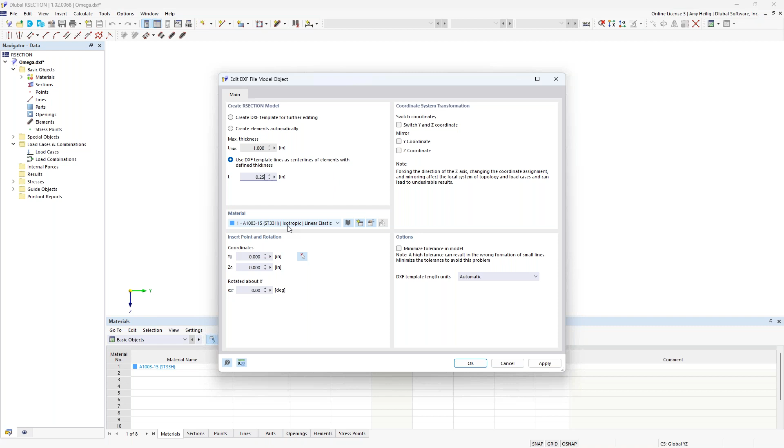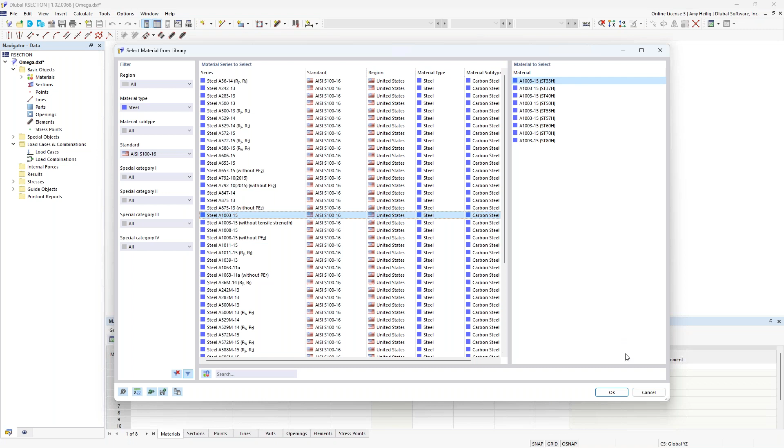We can visit our material library, and over on the left, we have the filters to utilize the steel dropdown and then the AISI S100. So here are all of the available materials for cold-formed steel. And notice that as we click through these different options, there are several subcategories as well. For this particular cross section, we'll utilize the A1003-15 and the subcategory here of ST33H. So that material will then be set within this dropdown, and we can click OK.

So once the import is done, we see everything automatically generated for this custom cross section. Now, notice that these are completely straight elements. We get a little bit better performance with the finite strip method with cold-formed steel sections when we just model these straight elements directly. It is possible to also model arcs at these corners where the elements join, but just know that the calculation time will be increased because of that. So ideally, it would be best to keep these as straight segments.

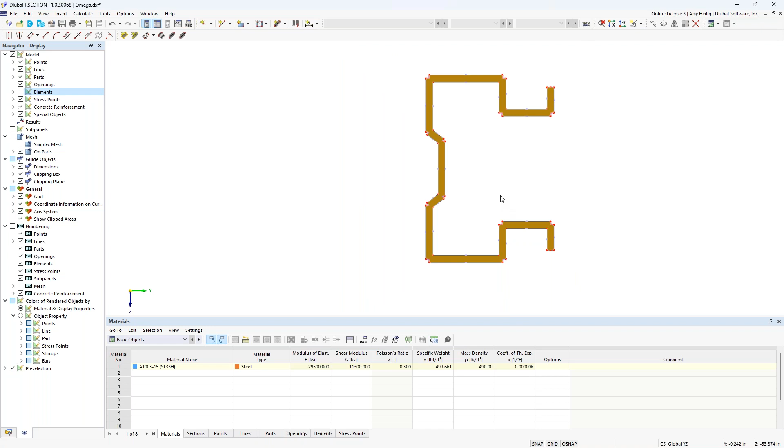Now, looking at the custom cross section here, we have a couple of elements that, again, were automatically generated. We'll start off with what we call the part. The part is automatically created between the exterior boundary lines of the cross section. Then on top of that, we have what we call the elements. Each one of these segments here is comprised of an element.

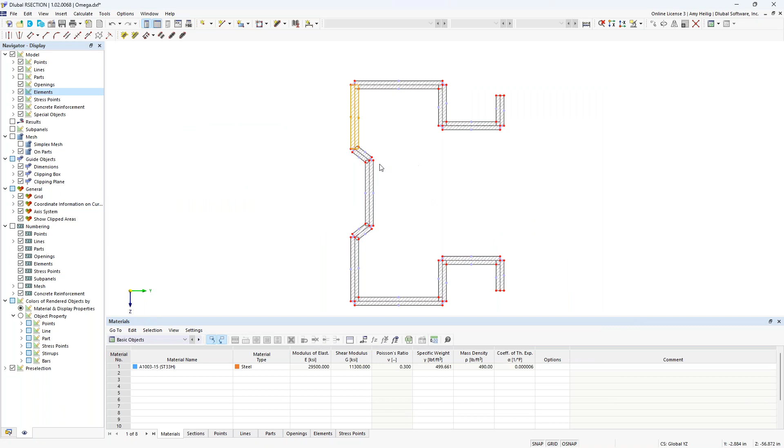We can right click to edit the element. What you'll see here is that each of these has a particular thickness assigned to it as well as a length. This information is important for the thin-walled analysis and is required. So we would need both the parts and the elements.

So going back to the navigator here, I'm going to right click on the model name to access the base data. There are two analysis methods. The finite element analysis is set here by default, but this would be more so used for massive cross sections. Instead, we want to modify this to a thin-walled analysis.

Additionally, under the manufacturing type, we can set this to cold form. This will just be helpful once we bring this cross-section into RFEM that this data will already be set. When we click OK, we can simply go to calculate, calculate all, and immediately we'll see here that the cross-section properties are presented to us in table format.

So we have the area, for example, the moment of inertia, the section modulus, and this is the information that needs to be transferred to RFEM in order to understand the cross-section properties here of this section. Additionally, you'll notice the unit stresses are given here based on a 1 kip applied load, for example, for axial forces or maybe a bending moment. We can also view those stresses with the 1 kip-foot applied to this cross-section.

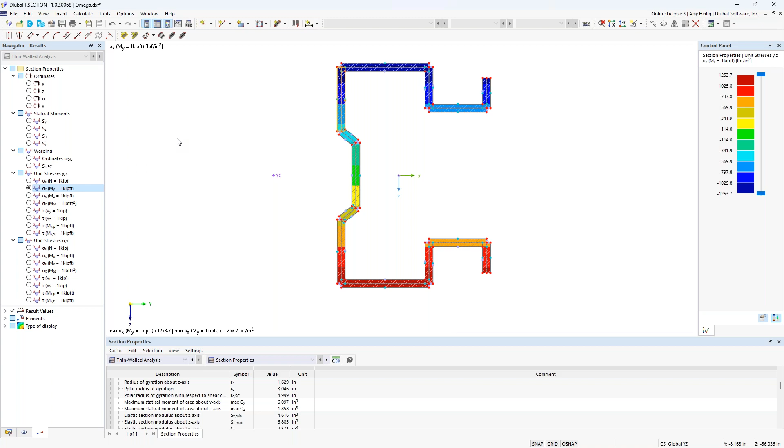So once we have the cross-section properties, we do want to save this to our computer. So in order to integrate in RFEM, we do have to have these saved cross-section properties from the calculation as well. And we will jump over to RFEM. So beginning our cold form steel structure today, when we create a new model, we would give it a model name. The type of model would be set to 3D.

And under this second tab, this is where we have our optional add-ons. So RFEM is the base program, and it's responsible for the modeling, the loading. We can integrate with BIM software, and it can run the full static analysis. So this means deformations, internal forces, support reactions. But if we want to take this a step further to actually carry out the design according to the AISI or the CSA S136, then we need to activate here the steel design add-on.

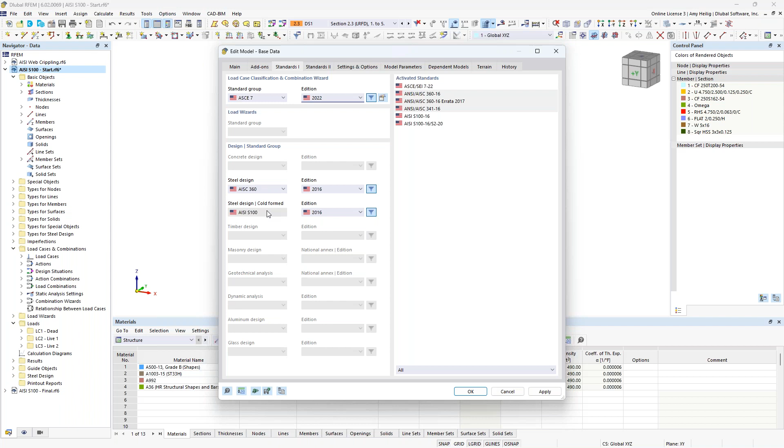Now, under this third tab, this is where we set our standards. So we can see that we will generate our load combinations automatically according to the ASCE 7. We also have here the NBC. We have implemented the latest standard according to the 2022 for those load combinations. Then because the steel design add-on is active, we see here the AISC 360 is set for hot rolled steel, and we have the AISI set for cold form. Now, alternatively, if we were doing design in Canada, we could set this to the CSA S16, and we'll see the cold form update here to the CSA S136.

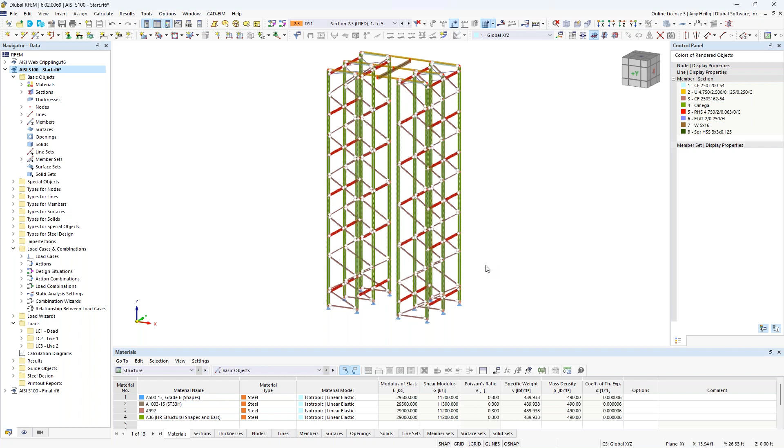So once this information is input, you can see here that for the sake of time, I have gone ahead and modeled our entire structure here. So this is some type of racking system maybe used for automatic storage and retrieval. Now we do have other webinars, tutorials that are dedicated to new users in the program where you can learn how to draw a beam, how to apply supports. So for the sake of time, again, we'll go ahead and just do a quick model review.

So over on the left in the navigator, we have here our various cross sections. So if I edit these cross sections so we can take a closer look, we'll see here the cold form steel sections applied to this particular model. So we have some channel sections, additional channel sections with stiffeners, and that custom cross section here was also brought in from RSECTION.

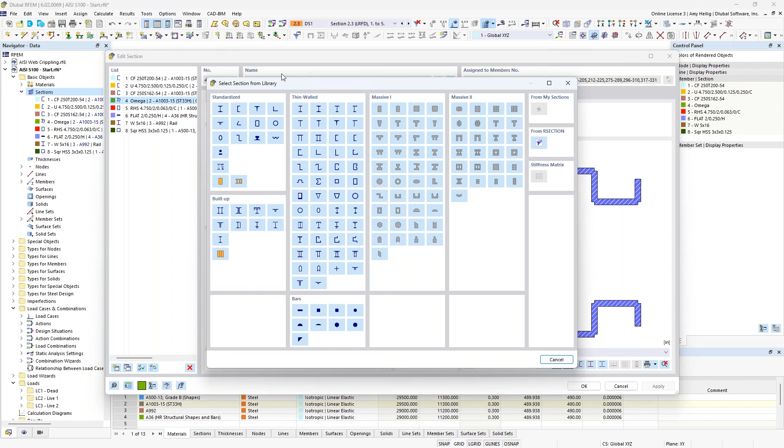When we look at our library database for our cross sections, if you want to choose a standardized section directly from the AISI, for example, if we take a look here at our channels, we'll utilize the filters once again on the left to filter to the United States, as well as the AISI D100-17, and we see the various channel cross sections, including hat cross sections, available to us here, again, directly from the AISI standard.

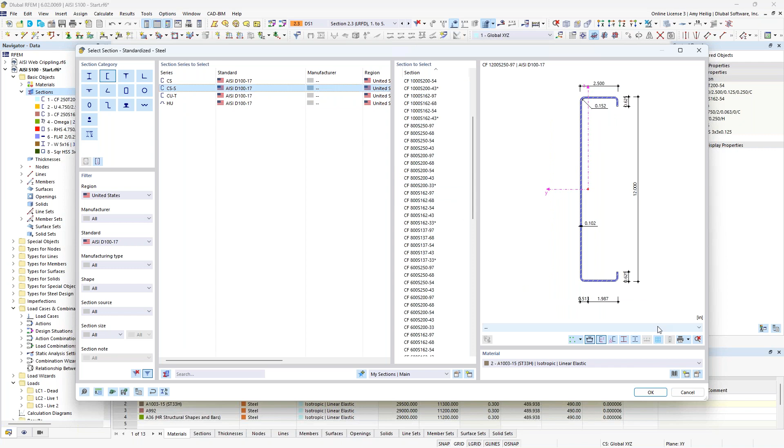Now, alternatively, if you have a parametric section that fits within the criteria listed here under thin-walled, you could simply input the dimensions and the custom cross-section properties will be automatically calculated in RFEM directly. And then alternatively, we have the import here from RSECTION, and that's what we utilized for the shape here in the background. I just navigated once I clicked this option to that saved file from RSECTION on my computer, and we can bring this in like we would any other member.

So in addition to these cross sections, I have also assigned a material. So similar to our section, we can always visit the material database. Over on the left, we filter to steel, to the AISI, and once again, we have access to all of these various materials directly from the standard.

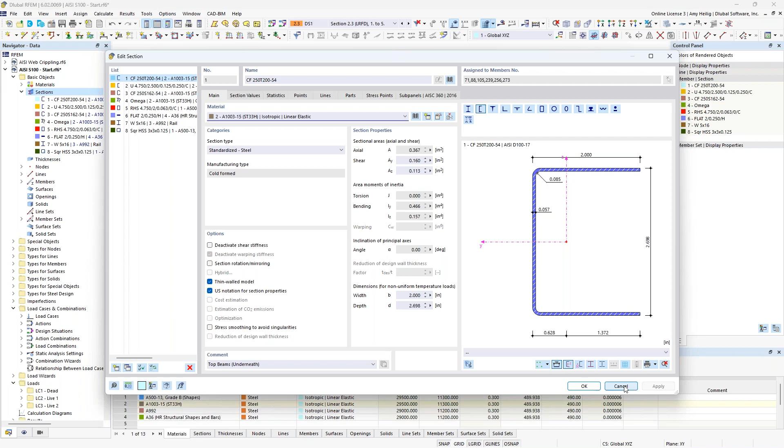So now that we have the cross sections and the materials covered here, we'll also see them within our navigator over on the left. When we take a look at that custom cross-section here for our column, and I'll zoom in, you'll notice that the program has actually rendered this true cross-section for me. And I'll go ahead and create a user-defined visibility here so we can see this in a bit more detail.

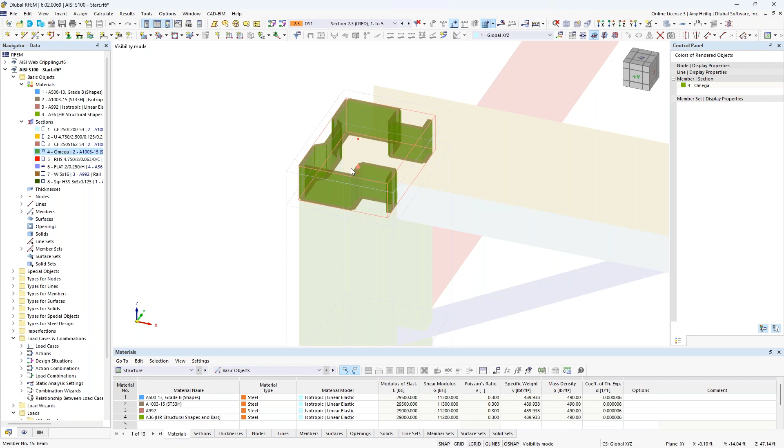So you'll also notice that for these columns, utilizing the custom cross-section, they were actually modeled in segments here. So each one of these is a separate segment. Now, there is possibility in the program to model this as one continuous column and just to keep this as one member and applying intermediate nodes along the length. But alternatively, if we do model this in separate segments, it's entirely possible to create what we call a member set. So we do this by selecting multiple segments.

We can right click, and under the members option, we have here what's called create member set. So that's what you'll notice here over in my navigator, that the program has grouped together these columns. And this will come into play a little bit later on with topics like notional loads, but also the design. Again, wanting to design this as one continuous member rather than those multiple segments.

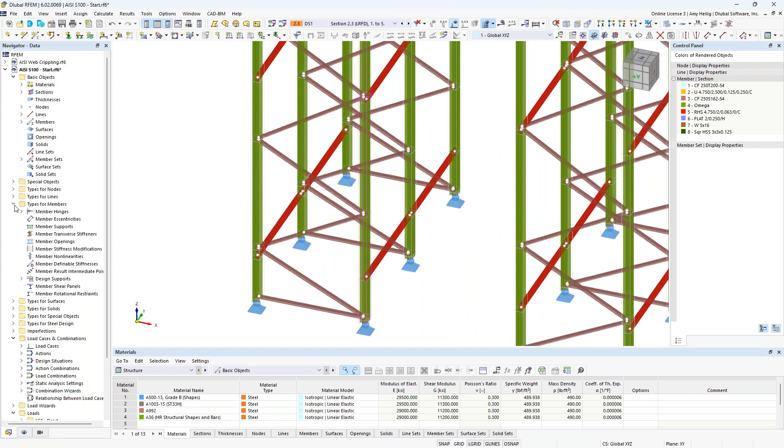You'll also see graphically the member hinges applied with the symbol shown at the member ends. So if we take a look at the types for members, we see here our various member hinges, and the member fixity all depends on how these cross sections or these members are connected to one another. So with cold form steel, it's quite typical to connect them with screws. And I have several different definitions here, just depending on what that connection is.

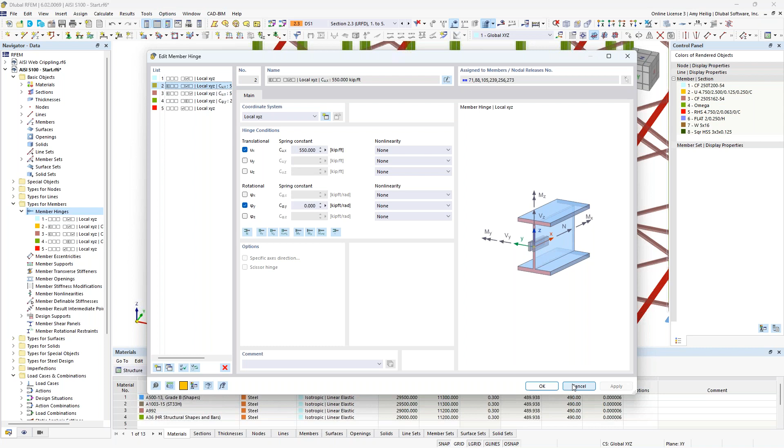So we have our 6 degrees of freedom. These are all based on the local axes of the member itself. You'll notice that for some of these, I've applied a spring constant. So something that's not fully fixed, not fully released, but somewhere in between. So within this model, we can take a look at the different hinges applied. They're probably a little difficult for you guys to see, but as I click through these, they are highlighted in the model depending on which member they are applied to.

And finally, we have our nodal supports down here at the bottom, which were applied just utilizing the tool up here in our toolbar. And these are also a bit special in the sense that initially they just look like standard pin connections, which you'll see under this definition type that we again have 6 degrees of freedom, but these are based on the global axes here, shown here in the background.

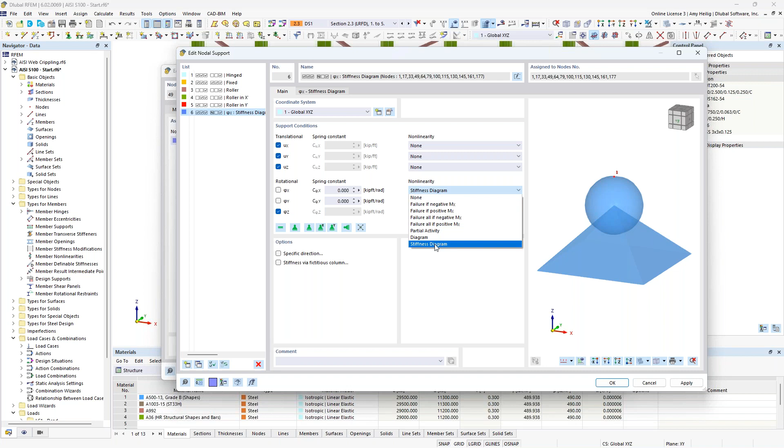So I've restrained the translation for this pin support, including the rotation about the global z-axis, but I've also applied a rotational nonlinearity. So this is within the rotation about the global x-axis, and under the nonlinearity options, I've applied a stiffness diagram. And we now get a new tab here where we can define this information. So you'll notice that I've set this so that the rotational stiffness is dependent on the contact pressure or the downward force for these nodal supports.

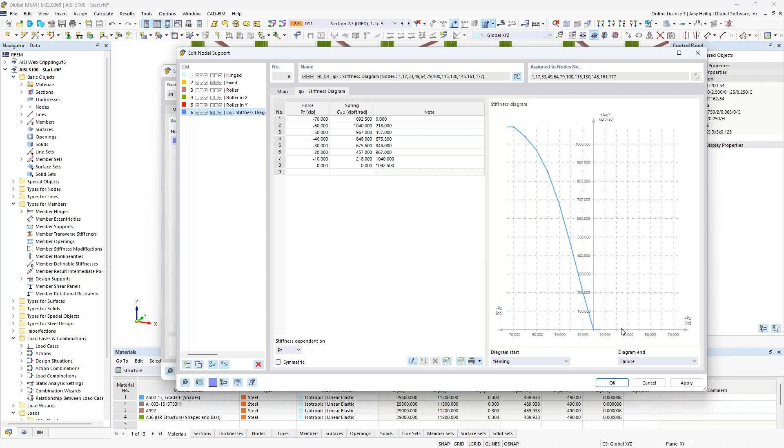So as the contact force increases here, we'll see a greater spring constant, and then at uplift, we'll see that support fully fail for rotation about the global z-axis. So entirely possible here to consider more complex scenarios for our nodal supports as well. So now that we have a basic understanding of the various members within the model as well as our supports, let us move on to loading.

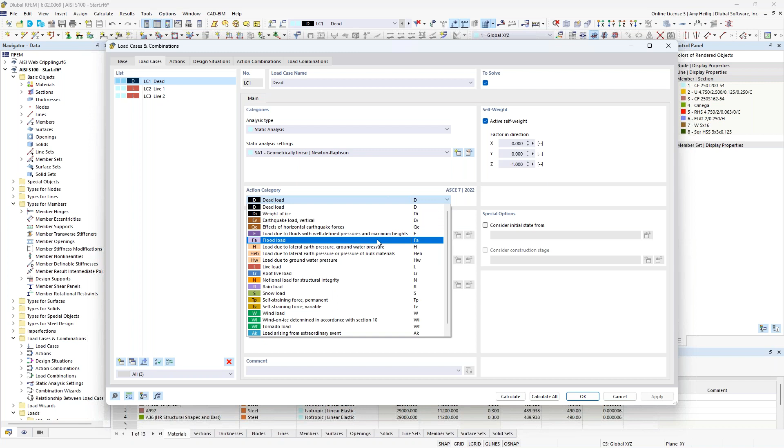So I have here 3 simple load cases that we can access in our load cases and combinations dialog box. So we have the first load case, which is dead load, and you'll notice that self weight is active here, and the action category is also set, which is just dependent on the ASCE 7, because remember back in the base data, this is the standard we're using to generate our load combinations. We can revisit that information here under our base tab, where we'll see the availability to change that standard if we'd like.

The second load case is a live load. So action category set to live, self weight is turned off here. And finally, another simple load case, live load 2 with the action category set to live. So once these load cases are set up, we would need to actually apply the loads to the structure. So we'll begin here with the display of our dead load. So you'll see that I actually didn't apply any additional loads to this load case. We're only accounting for self-weight automatically under the hood for that particular load case.

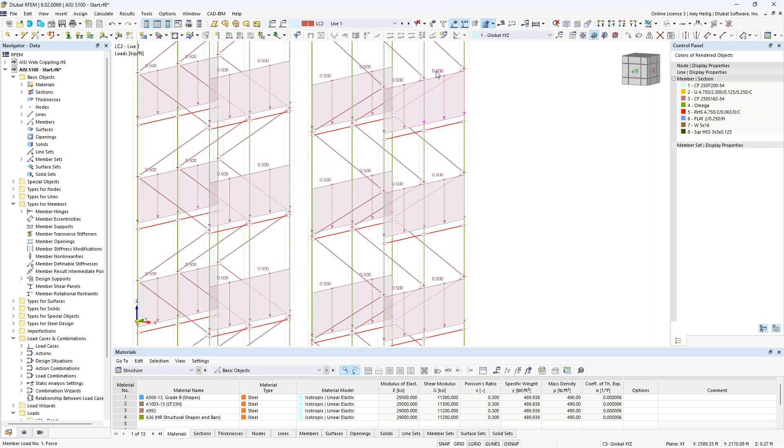Now looking at our live load 1, we see here, and I'll turn this into wireframe view, that we have the member load applied here at our beams, which are spanning between the columns. And a member load can be applied up here in the toolbar. But there is something a bit special about this particular member load. If I double click on it here, we'll see that it's just a standard downward uniform load of -0.5 kips per foot, but we have the ability to consider an eccentricity on the loading.

So when I turn this checkbox on, I get the additional tab up here at the top. Now the default behavior for a load is typically applied at the center of gravity or possibly the shear center. But alternatively, we can move that load application up here to the top center point so that perhaps we want to account for some additional torsion within the member for the design, or we can do so directly within the force eccentricity.

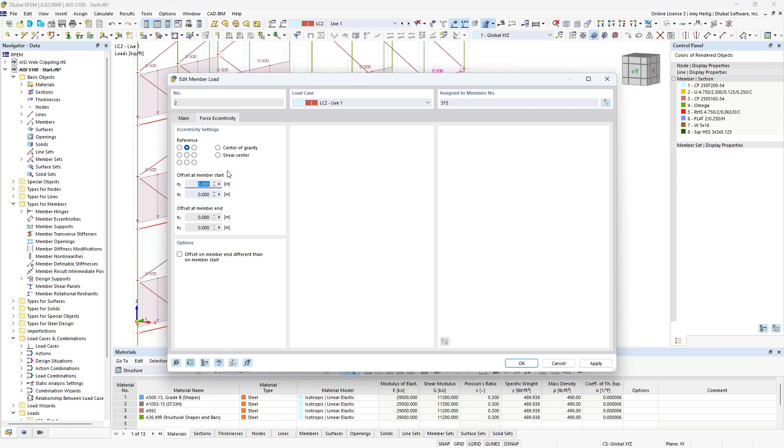So in addition to this first live load, we also have this second live load, and this is also a very simple application with a single nodal load applied up here to our center beam. So this load is just essentially introducing those horizontal forces to the entire racking structure. That nodal load can also be applied up here in our toolbar.

So going back to our load cases and combinations, now that we've generated those load cases, let's take a look at the design situations. So the program has automatically created 2 design situations for us, our LRFD design situation and ASD design situation. Again, these come directly from the ASCE 7, and it's nothing more than just grouping together our factored load combinations for the first design situation and our unfactored load combinations for the second design situation.

We can always click on this little info button here, which will pull that information directly from the standard of what we're referencing. Design situations are absolutely needed when it comes to carrying out the design within the steel design add-on that we activated. So that's why you'll notice that these are by default checked on here for that particular add-on.

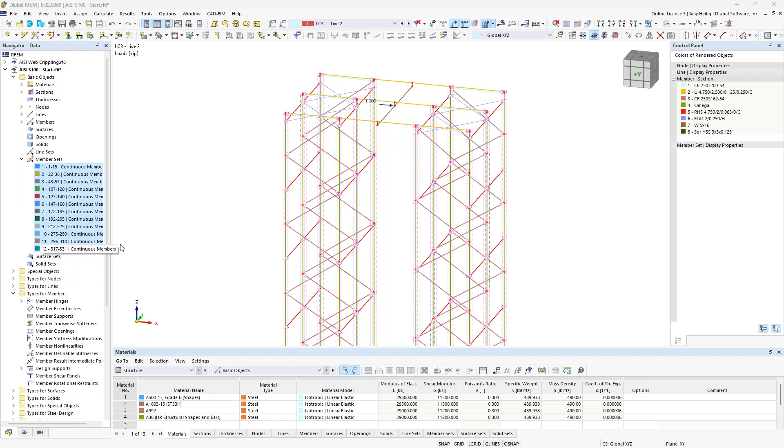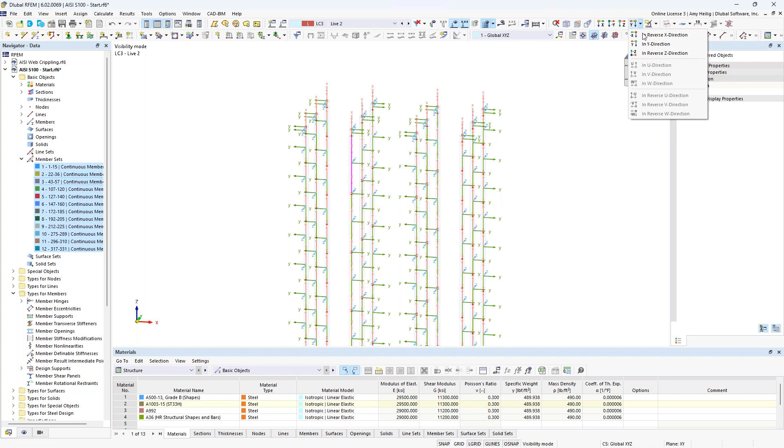So I'll begin by creating a user-defined view here for only my member sets. So we'll go up here to our toolbar and create that user-defined view. I'll go ahead and turn off the hidden objects in the background. Now, additionally, when we create our imperfections or our notional loads, these do depend on the local axis system. So if I right click, I can turn on the local axis system of all of these columns. So we'll take a look at the elevation view here.

Now, the imperfections are going to be available under our navigator here under the imperfections table. So we right click to create a new imperfection case. Now, again, the imperfection directions or the case all depends on which direction you want to apply them in your model.

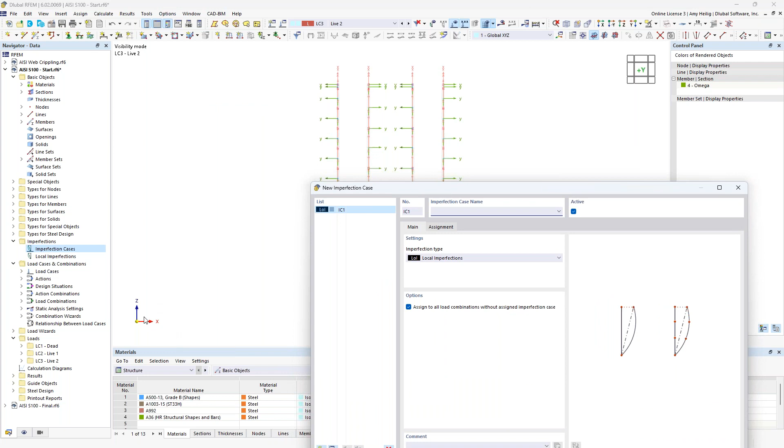For our case today, I'm going to create two simple imperfection cases, one in the global positive X direction and one in the global positive Y direction or into the page here. Therefore, I need two imperfection cases. So we'll begin with imperfection in the X, and then I simply make a copy of this and I'll create my second case, imperfection in the Y.

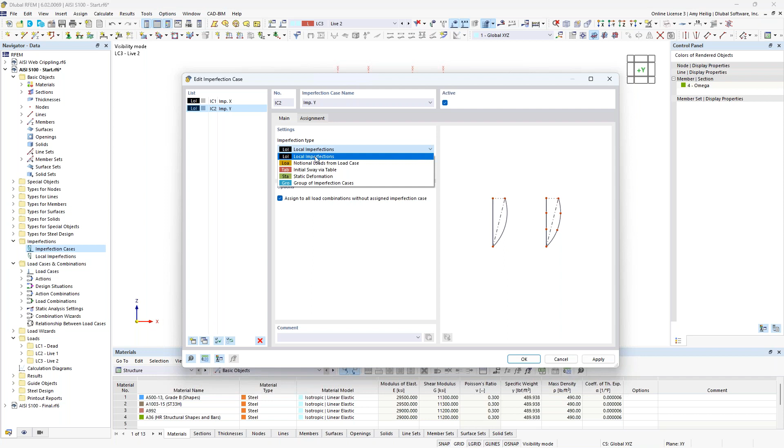Now, the imperfection type within this dropdown will be set to local imperfection. And under the assignment tab, there is the ability to assign specific imperfections or notional loads to specific load cases. Alternatively, though, we can just apply it to all of our load combinations, which is what we'll be doing today. So now that these imperfection cases are generated, we need to actually apply the notional loads to the structure. So now you'll see here under our imperfections folder, these two imperfection cases.

Now we can apply according to each individual member, or we have the ability to apply to a member set. And because these columns are individual segments and I created member sets to group them together as one continuous member, then we will want to right click here to create a new member set imperfection. So within this dialog box, we use our drop down to directly select the AISI S100. And this is going to reference equation C1.1.2-1 directly from the code. So this should look familiar if we look that up within the code.

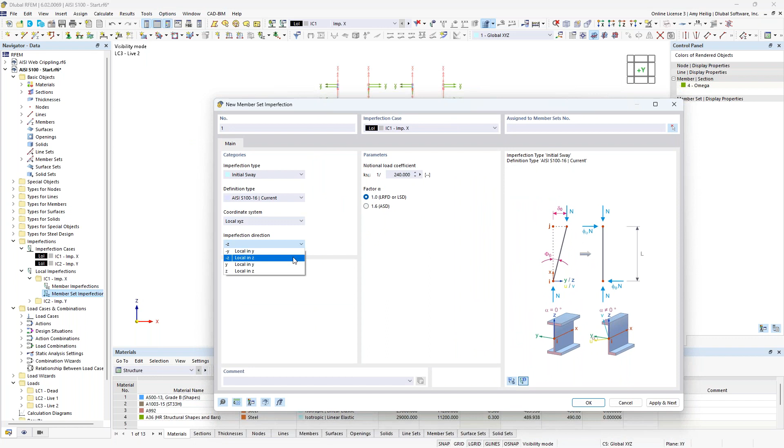So more or less, we are just applying a deflection here at the top of our columns, but the deflection magnitude all depends on the axial force applied to the member. So this is an iterative calculation that the program will automatically apply for us based on the axial forces under each load combination. The imperfection is applied according to the member's local axes. So for this first imperfection in the X direction, we want to apply this based on the negative Z axes. And I'm going to select here my member sets in the first row and the third row.

And we might be wondering, why are the local axes different here for the different member sets? That's because in rows 1 and 3, I have the members rotated at 90 degrees, and at rows 2 and 4, they're rotated at negative 90 degrees. So inevitably, this affects our local axes orientation, which is why we need to take a two-step approach for the imperfection direction. So now that I've applied it to those member sets, I can click Apply and Next to remain within this dialog box and simply modify my imperfection direction to the positive Z local axes. I'll select these graphically as rows 2 and 4. I click OK, and I click OK once again.

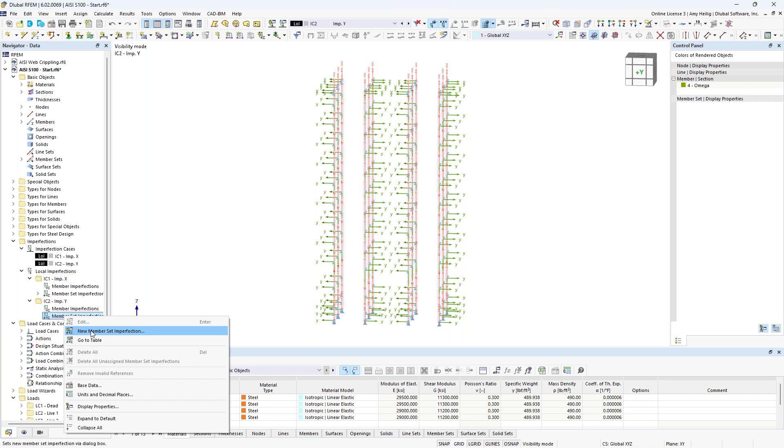Now, if we display our notional loads here, or imperfections, we see that column out of plumbness applied, again, referencing the AISI, to our member sets or our columns directly. We're going to do the exact same approach for imperfections in the Y direction. So we go back to our navigator to right click to create a new member set imperfection, this time under the imperfection Y case. We'll select the definition type directly as the AISI S100 once again.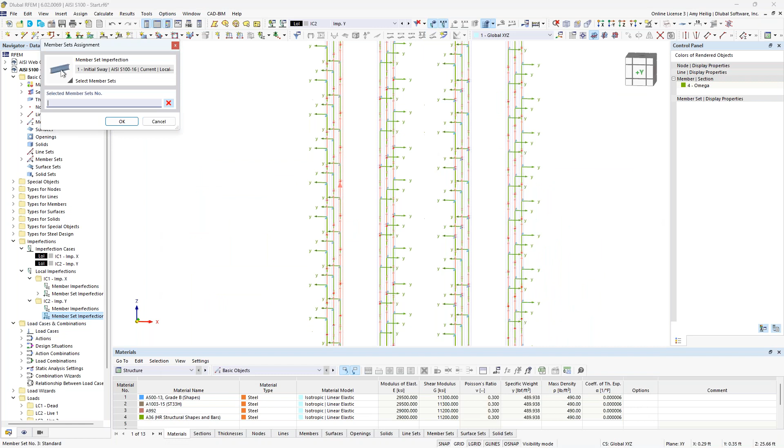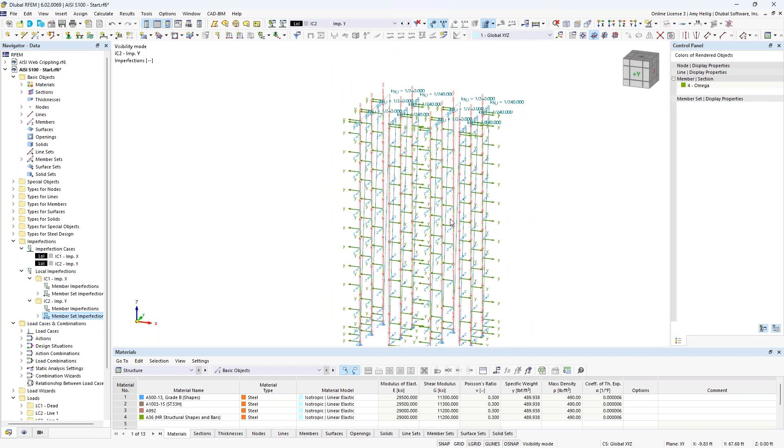The imperfection direction this time is going to be in the negative z-axis, and I will zoom in here to select the member sets in the first row and the third row. I click OK, apply and next, and then we simply modify this to the positive local z-axis to select our member sets in rows 2 and 4. I click OK through these dialog boxes, and now we should see this column out of plumbness, and I'll right click here to turn off the local axis system, applied in the global Y direction. So this is how we can directly account for those imperfections based on the code requirements.

Now that we have applied the imperfections in these various cases, we need to combine them into the actual load combinations. So I'll drop down here to my dead load, and this will allow me to access the load cases and combinations dialog box. Under the design situation where we had previously set the second order analysis, you'll notice that we have a checkbox to consider the imperfection cases that is turned on by default. So for my factored load combinations, those imperfections will automatically be added to the existing load cases as well. Now, the problem is that I want to carry out LRFD design today for my cold formed steel structure, but I'm using my ASD design situation for my serviceability or deflection checks.

Therefore, I don't want to consider my imperfections for this second design situation. Well, it's easy enough to create a copy of this existing definition type. And within this copy, I just simply turn off the imperfection cases. So now going back into my main dialog box for my factored load combinations, we'll keep this as definition number 1. But for my unfactored load combinations, we're going to drop down and select the third option here where we

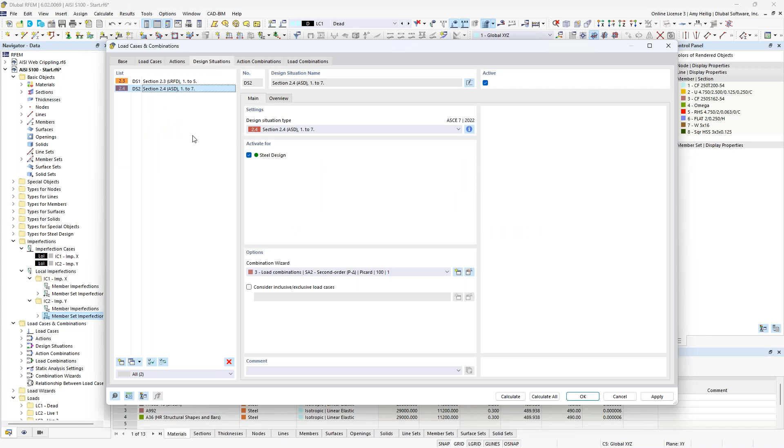The final topic, according to the direct analysis method, is stiffness reduction, and this is given in section C1.1.3. We reduce this stiffness to account for inelasticity effects as well as cross-section deformations. So in order to take into consideration the stiffness reduction, we are once again going to go in here to our combination wizard settings. And this option is actually controlled directly here with a new structure modification. So we create a new definition type, and we're going to be applying this to our members. When we turn this on, we get an additional tab here, where under the member modification, we can use our dropdown to create a new member stiffness modification.

Now, very similar to what we saw with our imperfections or our notional loads, we also have the AISI S100 available in this dropdown. So this will reference the code directly and the particular equations given here to iteratively calculate this tau sub b factor that will be applied to the flexural stiffness for each member. And again, this is very similar to what we see within the AISC. Now we also have an additional factor here of 0.9 that's applied to both the flexural and the axial stiffness. Now a difference here from the AISC is that within the AISI, this is 0.9, but within the hot rolled steel standard, this is 0.8. So that is one difference that you'll see here.

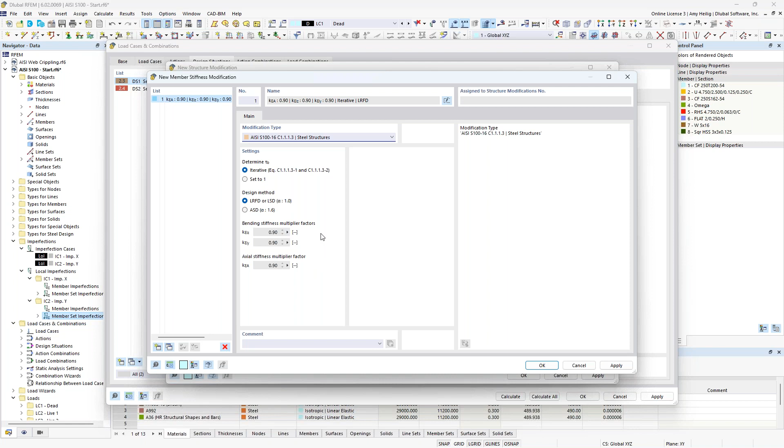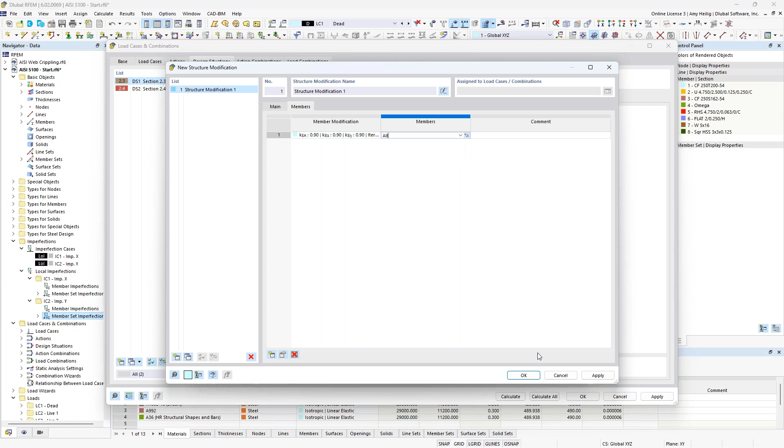Now, the code says to apply this stiffness reduction, once we have defined this, to all members that contribute to the lateral stability. So we certainly could use this option here to graphically select those members, or we could input the member numbers. Now, alternatively, we can just apply the stiffness reduction to all members. The code goes on to tell us that this is also possible. So if we use our drop-down box for all, we'll now apply those stiffness reductions to all cold formed steel members within this model. But yet again, I only want to consider this for my strength design, which will be carried out with this LRFD design situation. For my unfactored load combinations, I do not want to reduce the stiffness, so I simply leave this unchecked here.

So once again, we'll go back to the load combinations to check this out in more detail. And sure enough, for each factored load combination, we see the additional setting here to reduce the stiffness. But if we jump down to our unfactored load combinations, this option is turned off.

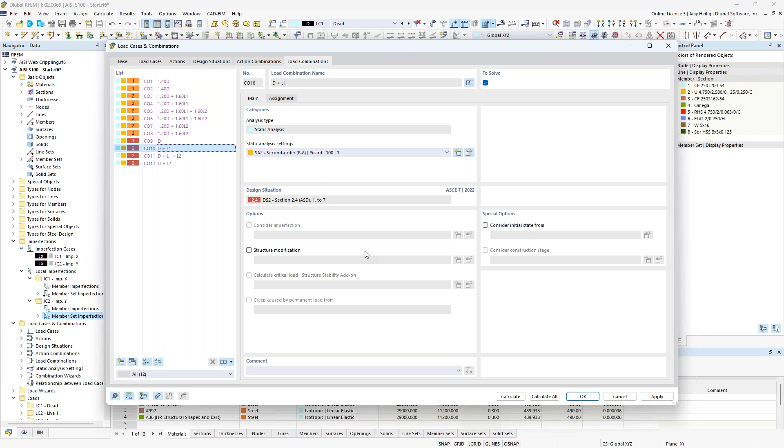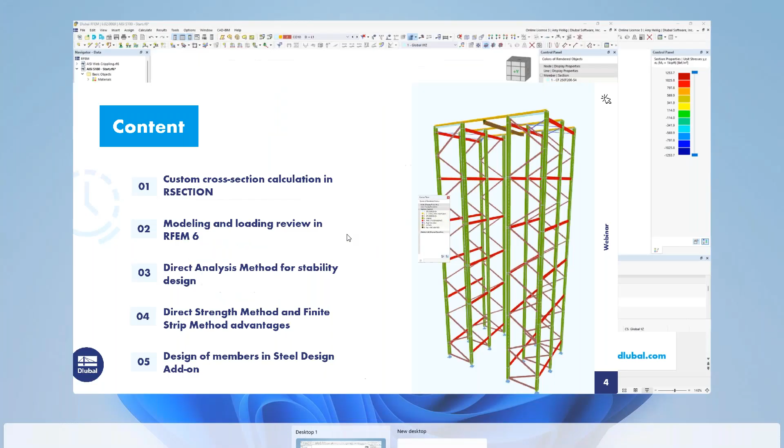Okay, so now that we have fulfilled the direct analysis method requirements, we're technically ready to run the full analysis. But the huge benefit of RFEM 6 is this better integration of these add-ons for the design within the main program. So we'll go ahead and continue on with some of the design input information specific to the AISI to carry out that workflow. For this, I'm going to go back to the PowerPoint here because I do want to talk in a bit more detail about the member buckling behavior. Very important topic when we're talking about these very thin-walled cross sections.

So we know that there are failure buckling modes that are typically caused by compressive stresses on our members. And this is usually seen when we have a bending moment or an axial force. Well, when we're talking about cold formed steel, there are 3 buckling modes that we typically consider. The first is going to be local buckling. So this is essentially where the elements bend with no translation at fold lines. And what I mean by elements, if you remember back to our custom cross section here, each one of these segments is a particular element. Well, what we see also with this failure mode is that we have a short half wavelength. And what I mean by wavelength is this is the length at which the buckling shape repeats along the full member length.

Now, additionally, we also have global buckling to consider, and this is lateral bending of the entire member, and we typically think of this with flexural torsional, or lateral torsional buckling. Now for this, we'll see one long half wavelength, which is always dependent on the unbraced lengths for these particular buckling modes.

And finally, a bit more unique to cold-formed steel is distortional buckling. So this is more or less a combination of local and global failures, where we have some translation at the fold lines, but also the half wavelength is somewhere between what we see for local versus global. Now, there are 2 methods throughout the AISI to address buckling. The first is the effective width method, and the second is the direct strength method.

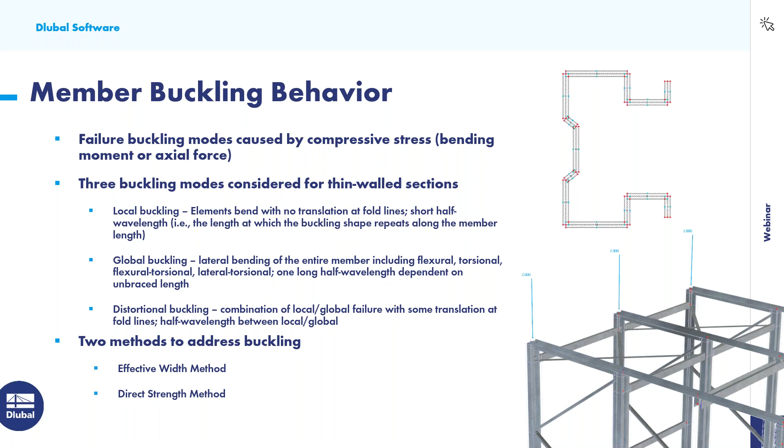So going to our next slide here, let us talk a little bit more about the effective width method versus the direct strength method, and maybe some advantages here that we have. So the effective width method essentially will consider each individual element here. So again, these elements are what comprises up our cross section. And an effective section calculation is required for each one of these elements. And we really don't have any interaction between these elements for the overall member or section behavior.

Now, alternatively, when we turn to the direct strength method, and this is going to be the method that RFEM is going to utilize, this has definitely some advantages in the fact that no effective width calculation is required for each one of these individual elements. There's no iterations required, but rather the gross cross-sectional properties are used for the entire section. We also have the interaction of all elements for all stability limit states because we're not considering, again, these individual elements, but rather the full cross-section itself.

We also have compatibility and equilibrium maintained at the element junctures. So where these elements connect is specific to the direct strength method that, alternatively, in the effective width method, more or less are not accounted for. Direct strength method is also applicable to a broad range of sections. We might see more limitations when we talk about the effective width method and which cross sections it can be applied to. Direct strength method, we really do have a lot more freedom here to apply this to pretty much any custom cross section as well.

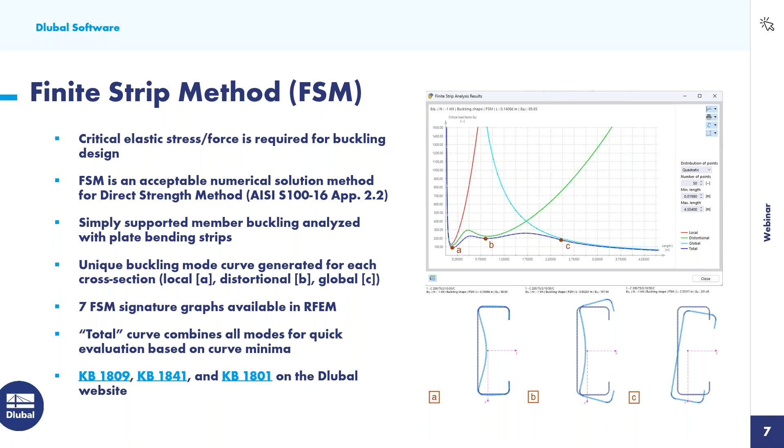Now, this is certainly a very interesting and complex topic, so I would refer you here to some knowledge-based articles that we have directly on our website that explain the finite strip method in more detail. It directly references the AISI. Those hyperlinks are included in the PowerPoint handout that you can access within the GoToWebinar to see those on our website in more detail.

Okay, so what we will do now is to go back to the RFEM model, and I'm going to revisit the cross sections here. So looking at the various cross sections, and we'll immediately jump down to that custom cross section, our Omega section in particular. If we use our drop down over on the right, here are those 7 unique graphs that I just mentioned for the finite strip method. And these are all based on the applied unit load.

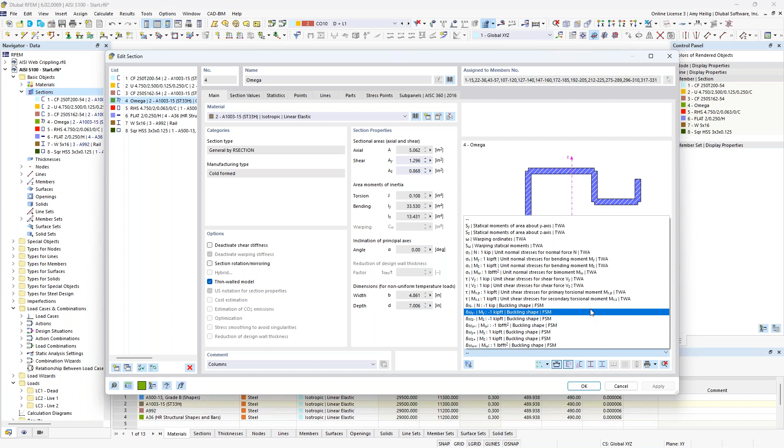So if we take a look at 1 kip axial force, what we will see is that finite strip method plot, again, referencing that PowerPoint. And this currently is showing the total curve. But additionally, what we can do here is to plot the local curve by selecting it within this dropdown. And we see that appear over here on the left-hand side with the red curve. We can also display the distortional curve. And finally, we can display the global curve.

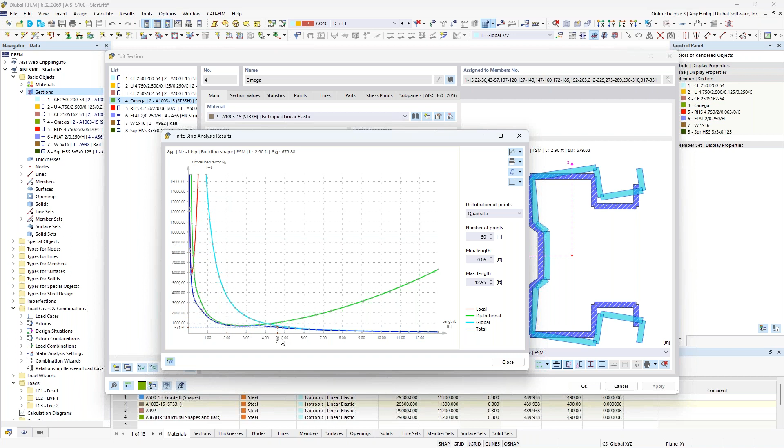And ultimately, that total curve is going to consider all 3 of these, again, for just a quick evaluation here based on the curve minima along the length. So this is what's happening underneath the hood for every single cross section, again, even if it's a custom cross section. So now that we have a better understanding of the direct strength method, finite strip method, we'll go ahead and take a look at global buckling now in a bit more detail with effective length definition.

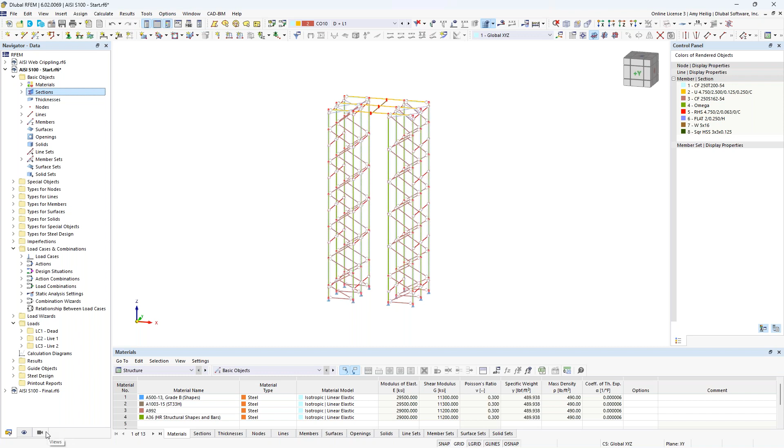So when we design our members, we need to input information such as unbraced lengths. We'll begin here with activating only my rectangular HSS section. So let me go ahead and show the rendered view of this so you can understand exactly where these cross sections are. So these rectangular sections are spanning in between my columns. And we'll begin with the effective length definition for these particular members.

So we highlight them all, we double click, and what you'll notice is that the design properties here is turned off. This is telling the program that I'm not interested in carrying out the actual design according to AISI. Rather, I only want to carry out the analysis. When we turn on the design properties, this is going to reference the Steel Design add-on, and we get additional tabs here up at the top. So this is all information that is specific only for the design.

Under the design types, we have here the effective length definition. So let us go ahead and access a new effective length definition. And you'll see here I can modify my view over within this dialog box so we can see those HSS members spanning between the columns. We immediately want to change this to the effective length definition according to AISI S100 for these rectangular hollow sections.

Then you'll notice that for global buckling, we have here 4 considerations: flexural buckling, strong and weak axis, torsional buckling, lateral torsional buckling. We also have the ability here to determine the elastic critical stress according to the finite strip method or according to chapter E2 and F2.1. So this is a really important topic. So I'm going to jump back again to the PowerPoint here to explain in a little bit more detail.

So you'll notice within this dialog box, as I just showed you, that we have 2 options here to determine the elastic critical stress. And the first option being the finite strip method or the numerical method. And this is going to be applied then for local, distortional, and global elastic buckling failures. But it should be known that if we do choose the finite strip method, that flexural and torsional stability failure modes are always grouped together for the global buckling. And this is regardless if we uncheck one of these options.

So if I am thinking, okay, my member is fully restrained against torsional buckling, but I'm still concerned with flexural buckling, so I fully uncheck this option, the program doesn't care. It still sees these grouped together because we're referencing the finite strip method graph. So this is purely a limitation of how these graphs are created, that flexural and torsional buckling are always grouped together.

Now, alternatively, if we leave these checked, but we have varying effective lengths or unbraced lengths for flexural versus torsional, again, because these are grouped together, we are always going to take the longest effective length. So if we would like to set a smaller length for torsional buckling versus flexural, again, the program just groups them together for those particular global stability checks and will reference the longest effective length. So just keep that in mind with the finite strip method, again, with the global buckling.

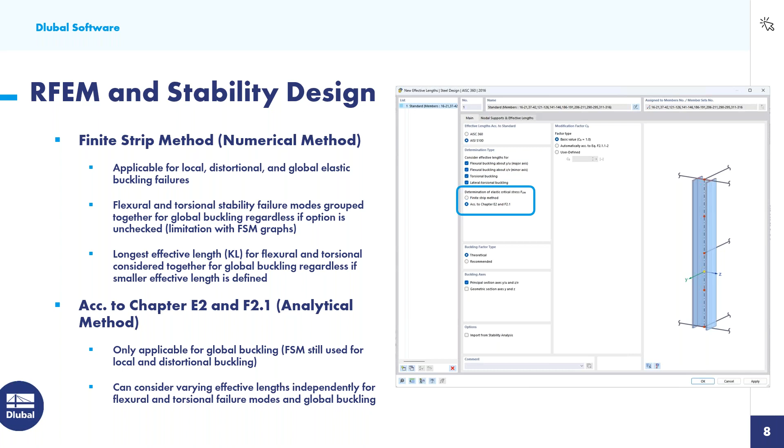Okay, so now that we have a better understanding here of what these various settings are, for my particular example today, when we have something like a tube section, we're really not interested in torsional buckling or lateral torsional buckling. And because I'm unchecking this, I'm going to utilize the analytical method here, because remember, the finite strip method would not detect the torsional buckling being unchecked. The program would give you a small warning, just letting you know that, hey, we see that you unchecked one, but we really can't consider it. So we'll utilize the analytical method.

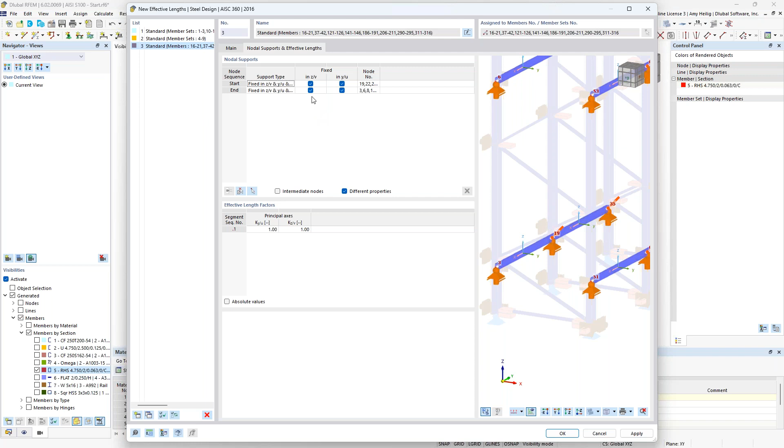Under this second tab, this is where we apply our intermediate supports, and you can see the program automatically will apply these at the member ends, and we will be fixed for flexural buckling in the strong axis as well as the weak axis. So that effective length, KL, will automatically be calculated for all of these members shown here.

So once we are done with the effective length input, we also have the ability to apply a local section reduction. Just keep this in mind that this is only for the tension design according to the AISI. We do not carry out any equations at this point in time for cold-formed steel considering holes. So everything is considered without holes.

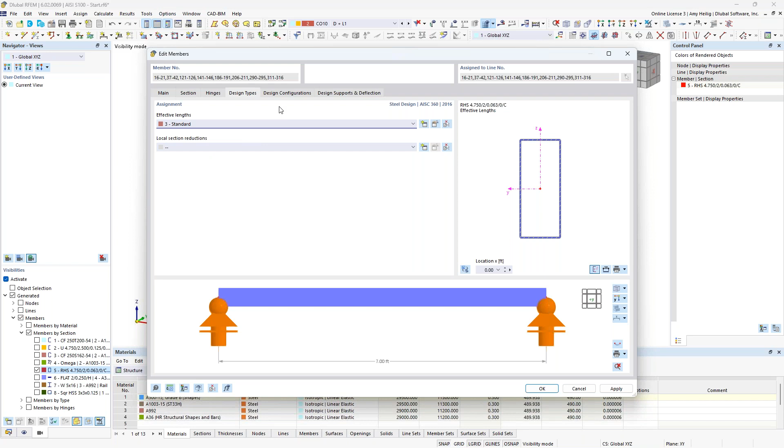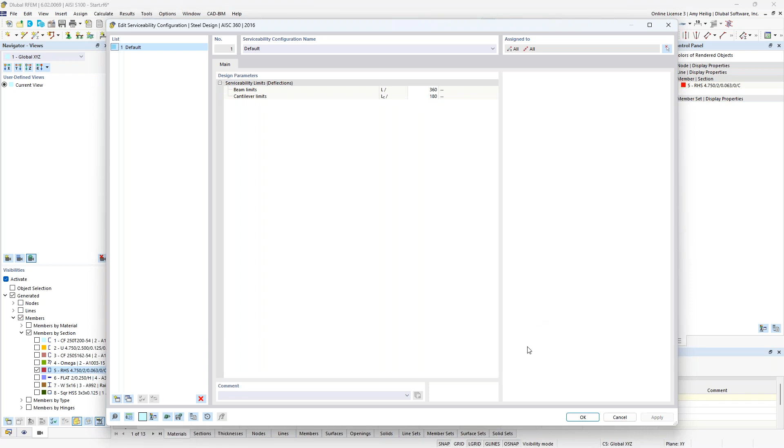Under the design configuration, we have here our strength configuration. So we take a look at the default settings here, just some various settings that we have put in the code references directly for alternative equations. So you could certainly take a look at here and make those modifications if you'd like. Under serviceability, this is just simply where we set our limiting deflection ratio for our deflection checks. So for simply supported members, we will reference this L/360, and for cantilevers, we'll reference L/180, but of course you can make modifications to this design ratio here.

And finally, we have the design supports and deflection. If I do absolutely nothing within this dialog box, the program automatically assumes that it's supported at either end. Therefore, we're going to reference the L/360 limiting deflection ratio. For our case today, we'll go ahead and leave this as default and not make any further modifications here. So now that this information is complete for these rectangular sections, I'll go ahead and cancel out my visibility here.

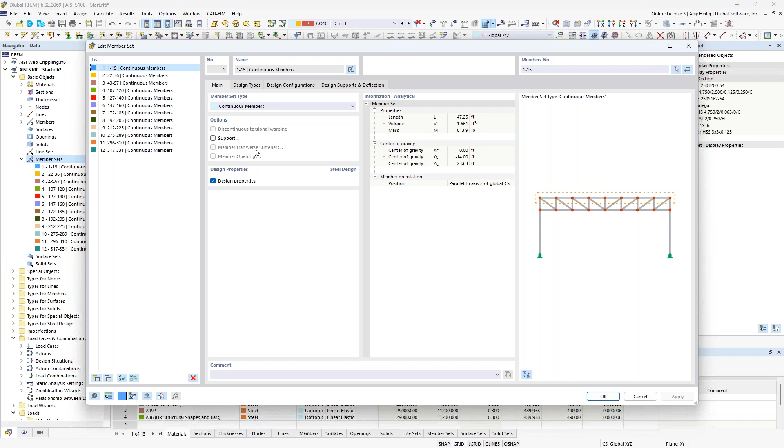I also have carried out the same workflow for my member sets. So remember, I want to design these columns as one continuous member. So rather than going into the individual member settings, we can come in here to our member sets. And what you'll notice within this dialog box is that this also has a design properties checkbox. So when this is turned on, we have some additional settings up here at the top within these tabs that look identical to what we just covered.

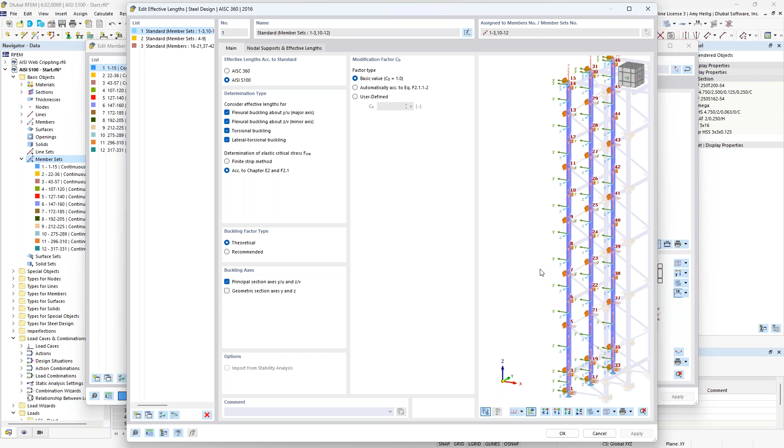Now, because this column is certainly much more complex, I went ahead and defined the effective length already here. So you can see that I have flexural, torsional, lateral torsional buckling all considered. I'll go ahead and change around my view here so we can see exactly which members we are looking at. I am referencing the analytical method here because I have some different unbraced lengths for torsional buckling versus flexural buckling.

Now we have the ability to detect these intermediate nodes along the entire length, and notice that there are 4 degrees of freedom. This just all affects the effective length definition here for flexural buckling in the strong axis, flexural buckling in the weak axis, torsional buckling, and lateral torsional buckling. So depending on our particular connection and what members are framing in here, we can set these accordingly.

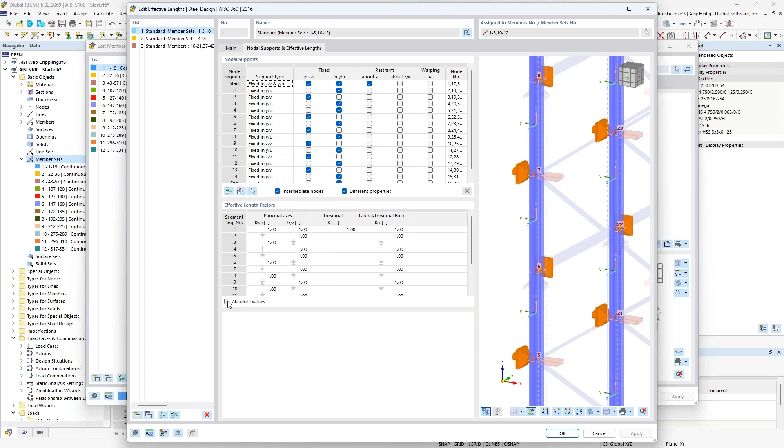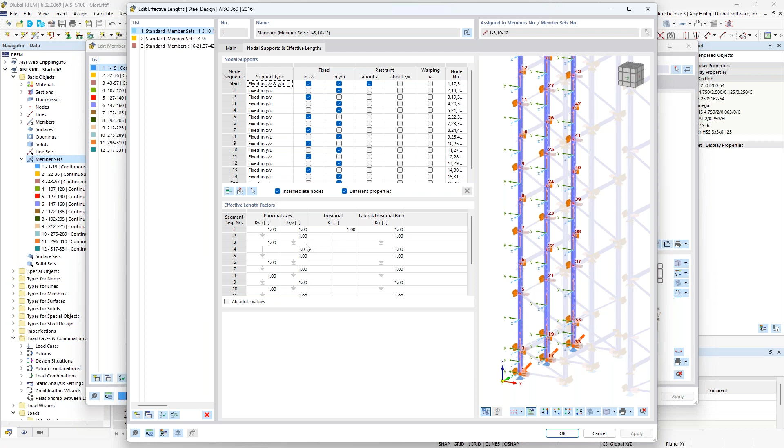And alternatively, if you have absolutely no interest in inserting in all of these intermediate supports, you can check on the absolute values here and directly input KL for each of these failure modes. And the downside to this is that if the model has any changes, maybe we modify nodal locations slightly. If we use these options up at the top, everything will be automatically updated for our unbraced lengths. Alternatively, if we override these, we would need to come in and manually modify them, but that's certainly an option that you can take advantage of.

Also, under the design supports and deflection, you can see here that I have assigned specific design supports depending if the member is supported in the strong or weak axis direction. And these are applied all along the member length because I really don't want to reference the full column height for my limiting deflection ratio, but rather I want to reference the L, or the length, in between these intermediate supports. And we do so with the design supports. And notice that all of these intermediate nodes were directly detected within the program.

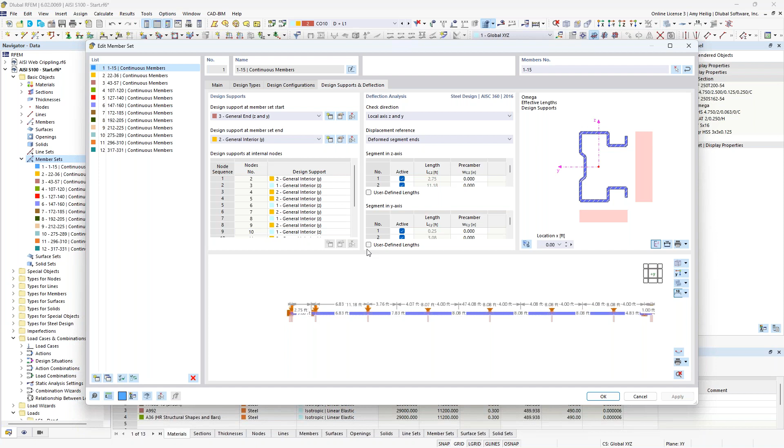Okay, so now that we have this information defined, such as unbraced lengths, we'll go ahead and exit out back to the program. And we want to jump down here to the steel design add-on. And you'll notice under this first tab, we have our design situation. So I had mentioned that if we carry out the design, we have to use these design situations. And the reason why is we see our first LRFD design situation that we are going to relate in the second drop down here to the strength limit state according to LRFD design. I'm using my second design situation, ASD, and I'm relating this to serviceability.

Now, alternatively, if we were carrying out ASD design, then maybe we would turn off altogether LRFD. We would set our strength limit state according to ASD for our ASD design situation. We can make an additional copy of this design situation for serviceability as well, or we could create our own custom design situation for serviceability. Again, for our example today, we'll go ahead and carry out LRFD design.

Under the second tab are the objects to design. Now you'll notice that defaults to designing all members and all member sets, but we have many members that are given to us over here in this column in red, and that's because they don't have an effective length defined. So the program won't be able to design them, of course. So rather than designing all members, let us go ahead and graphically select here by clearing out this entry, and I'll turn on only my HSS sections so that I can graphically select these. The member numbers are automatically input here.

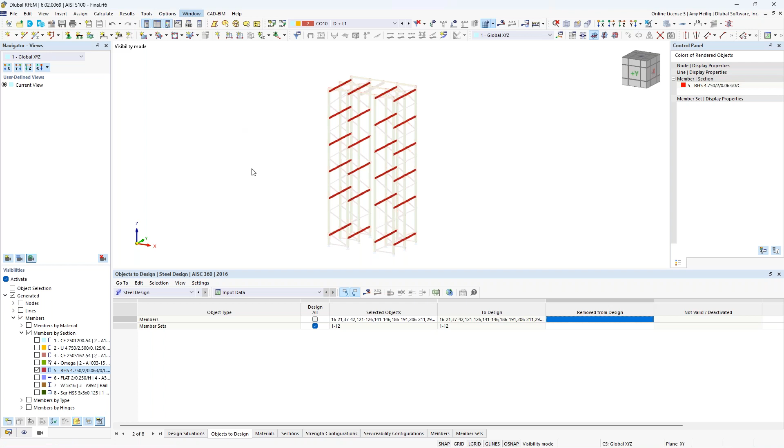And now we're ready to carry out the design for this simple example only for my rectangular sections, but also for all of those member sets or each of those columns. So we go to calculate all. Now, because of the finite strip method, remember for all of these individual cross sections, the calculation time does take a few minutes. So rather than waiting for that, we will jump to an already saved model here with our results. So once the calculation is done, we are currently looking at the steel design add-on, but we now have available to us the design ratios on the members.

And we could view these design ratios in the table format here for each individual member. And you'll notice that as I click within this table, the program will automatically sync here in the graphical view to show me exactly which particular member I'm looking at. That red arrow is showing me for that particular check exactly what's controlling. But maybe we look at the design ratios by the cross section because I've only designed 2 cross sections for today. We have here our custom cross section from our section that we brought into the program, as well as our rectangular hollow section here.

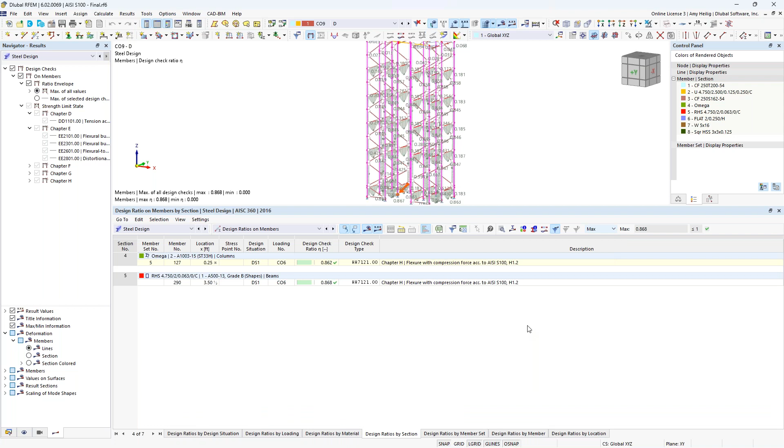And you'll notice that we are checking every single chapter here for our strength design, as well as serviceability, referencing each chapter. Now, if you're only interested in the max design ratio, we could always use our filter here to select the max. And now we see just the controlling design ratio for this particular cross section. And for these individual checks for each chapter, we can access what we call the design check details.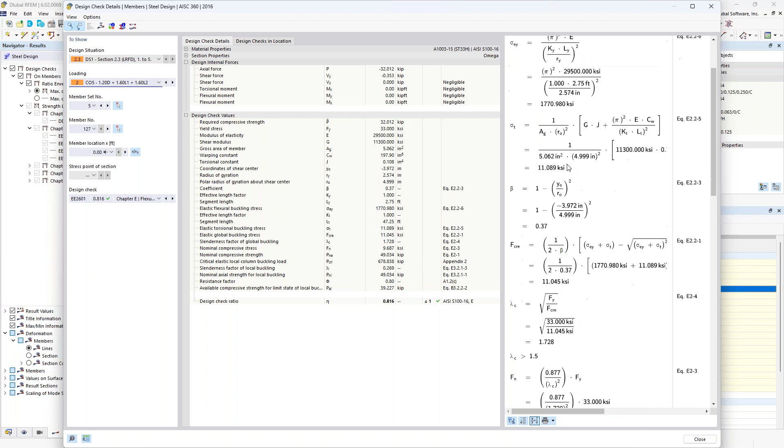So this is new within RFEM 6, that for all of these code calculations, you'll notice here that we list the formulas line by line. We have all references to the AISI standard, and we have all the variables also listed out here, and ultimately how we are calculating this design ratio. So trying to be as transparent with this information as possible so that you can follow along with your own hand calculations to ensure that you agree with the program's output.

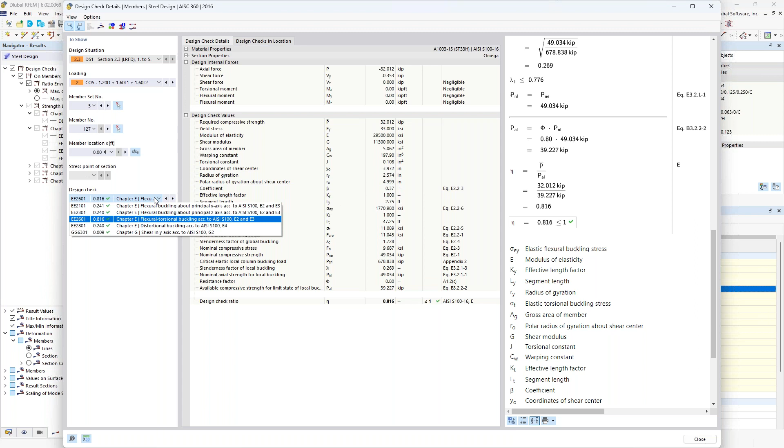We can print this to our printout report. What's nice is that if we do this and we make any model changes, we rerun the design, the picture of these calculations will automatically update as well. We can jump down to any different particular check here to view the various formulas for chapter E, for example. Also within this dialog box, we can access what's called the diagram in section.

So under my drop-down box, we see our custom cross-section here where we can view the stresses. And within this additional drop-down box, we can view the total normal stresses, or we can view the total shear stresses, or perhaps we're interested in the von Mises stresses. And this is all for load combination number 5 at the X location of 0. So just trying to give you a little bit more information here in terms of the stress output for these cross sections.

So now that we have viewed this information in table format, notice that over on the left under the steel design, we can turn on and off the various design ratios shown graphically here. Currently, we're viewing just the overall max ratio envelope, but you'll notice under these options, we can individually select the different checks.

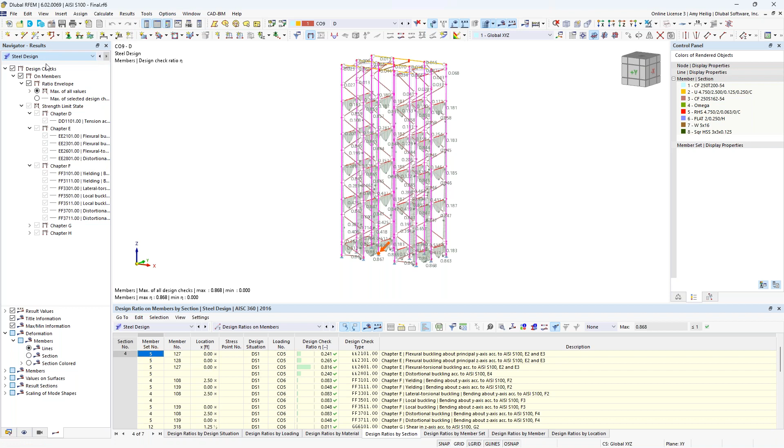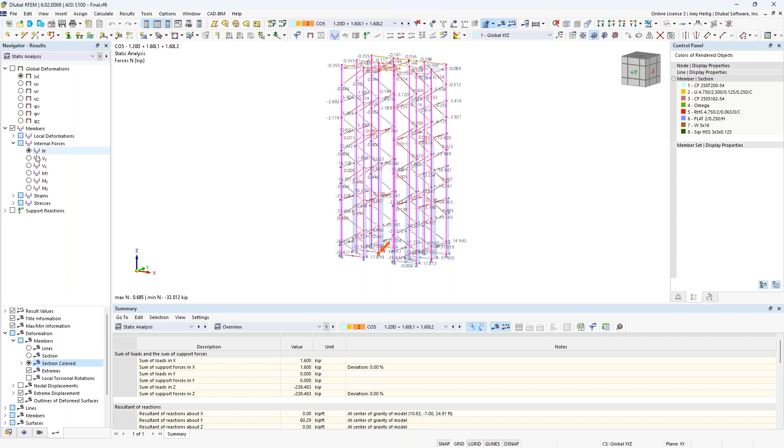So backing up a step, if we also use our drop-down here to take a look at the static analysis. So we're currently viewing any one of these load combinations, and this was the static analysis carried out directly within RFEM. So we can view the global deformations, for example, and perhaps I change my deformation display to colored cross sections. We can also view the member internal forces. So we can view the axial forces or the shear forces, bending moments.

If we zoom in here, we can right click on one of these members and access what we call the results diagram. And you can do so with individual members or groups of members. This will allow you to turn on these internal forces or deflections and view in a bit more detail what's going on along the member length.

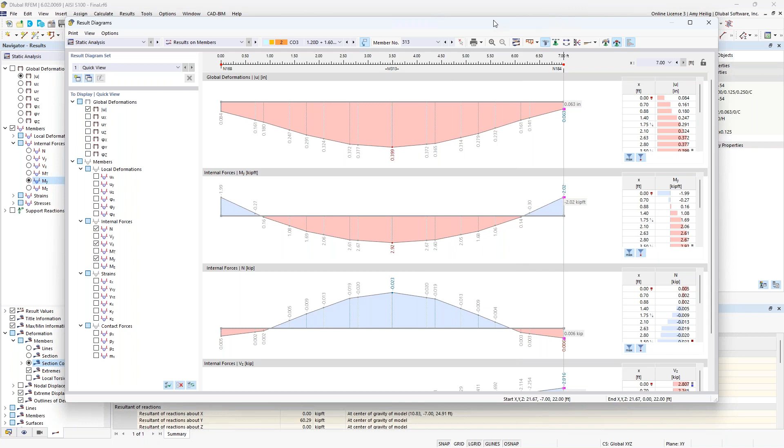We can switch to a different load combination here. We can add this information to the printout report. We can smooth, we can average out these forces. So quite a bit of information here that we otherwise wouldn't be able to do graphically. And you can slide this over to your second monitor and work concurrently in the program.

So in addition to the graphical output, we also have our table output for the static analysis, where we can view the results by member, such as the internal forces. We can export this information to Microsoft Excel with the click of a button up here for further sorting capabilities.

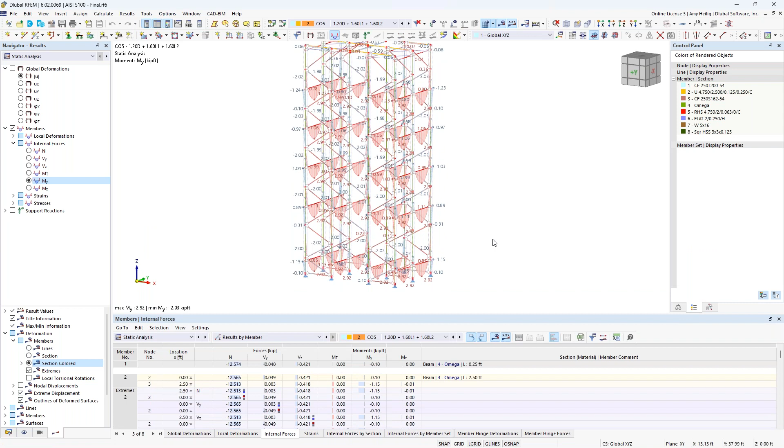So hopefully this just gives us a nice overview then of the full analysis and design workflow for these cold-formed steel sections according to the AISI. As we know, identical workflow for the CSA S136.

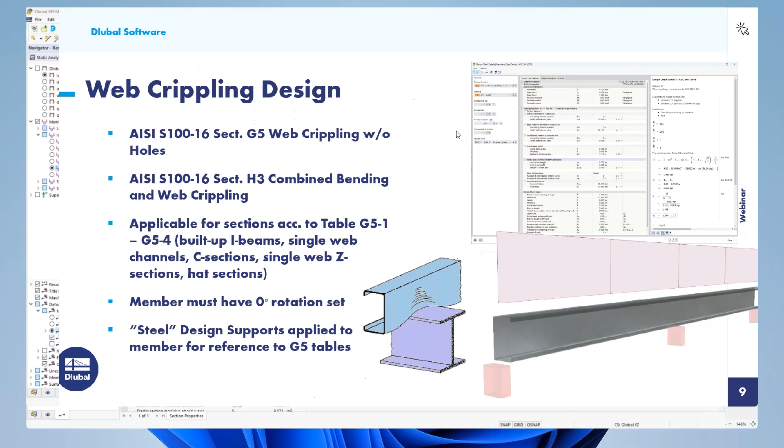So in the final few minutes here, I do want to turn to a topic that is maybe a little bit more unique for an FEA program. And this is web crippling design. So typically in a lot of FEA programs, we just simply can't account for these additional checks. But within RFEM, we actually have integrated these. So we can carry out the design of web crippling according to section G5, and this is web crippling without holes, as well as section H3, which is combined bending and web crippling.

Now, this is only applicable for sections that are referenced directly within the standard, in particular table G5-1 through 4. And those sections are listed here. So any other cross section outside of this list, we won't be able to check web crippling, so you would need to manually take that into consideration. Another requirement is that the member must have 0 rotation set. So we can't rotate this member 90 degrees or 180 degrees. We need to leave it at 0 if we do want to carry out these additional checks.

And finally, the last requirement is that we have to apply what we call the steel design supports. And this will allow us to directly reference these tables from G5 in order to carry out the full web crippling calculations. Now, we've already talked about design supports within our example model today that we use for deflection.

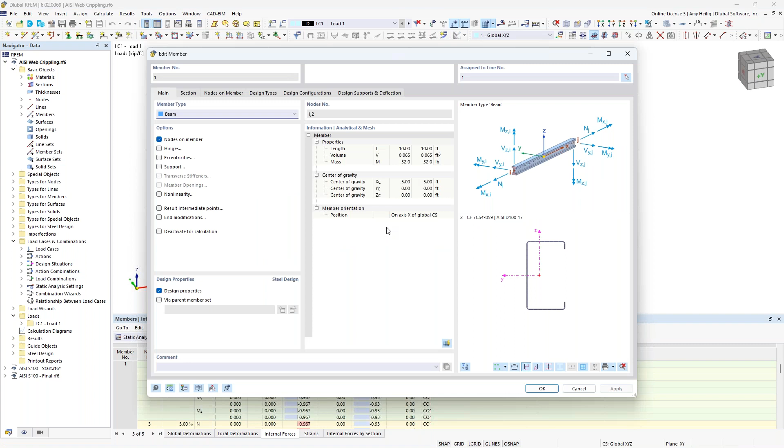Well, if I double click on this section, everything is as we've already learned from our previous example, except for let's take a look at the design supports. So you'll see here that I have already defined supports at the 2 ends as well as the interior with that automatically detected node, but we do need to create the design support definitions.

So you can see the first one, I have labeled this as the end support, and the type in this dropdown is set to steel. If we have this set to general, we'll only consider these design supports for deflection. But when we have it set to steel, this will allow us to further carry out not only the deflection checks, but also the web crippling.

So you'll see that I do need to give it a support width. So we enter in the support width. For my end support, I set this at 3 inches. We need to tell the program if it's an end support, if it has an overhang length, and also is that support fastened to the member. And this information is all important to reference to Chapter G5 from the AISI. Without it, we wouldn't know what variables such as safety factors, resistance factors, coefficients to reference without directly inputting it in here.

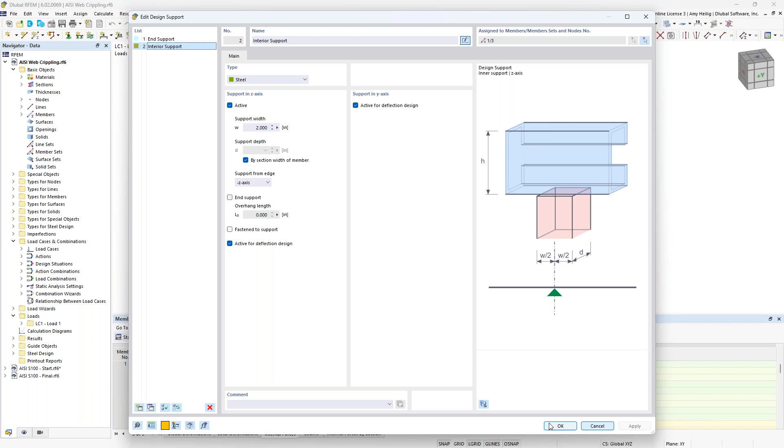Now I also have a second definition for my interior support. So if these supports vary, that's no problem. We just create a second definition type here. The type is set to steel. My support width was decreased to 2 inches. It's not an end support, and maybe it's not fastened to the member. So once we have the definition set, then we just simply use our drop-down box to assign them to the nodes along the length of the member.

So once this is input, we can take a look here at our steel design results. And you can see that my design ratios here, except for these ones shown in red, are very low. We have 0.304 or lower for this particular cross-section design according to the AISI. These two checks that are over the 1.0 ratio are specific to web crippling. So you can see how perhaps if we forgot to carry this out, the member looks like it's passing quite well. But when we add in these additional web crippling checks, we see that actually the member is not adequate. Again, web crippling according to G5, as well as combined bending and web crippling according to H3.

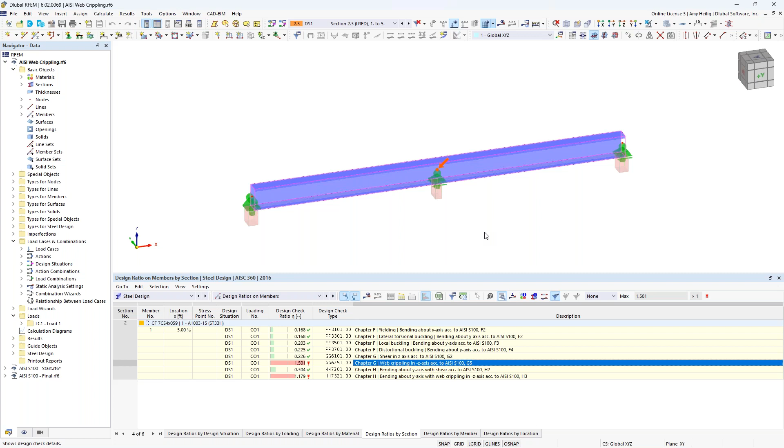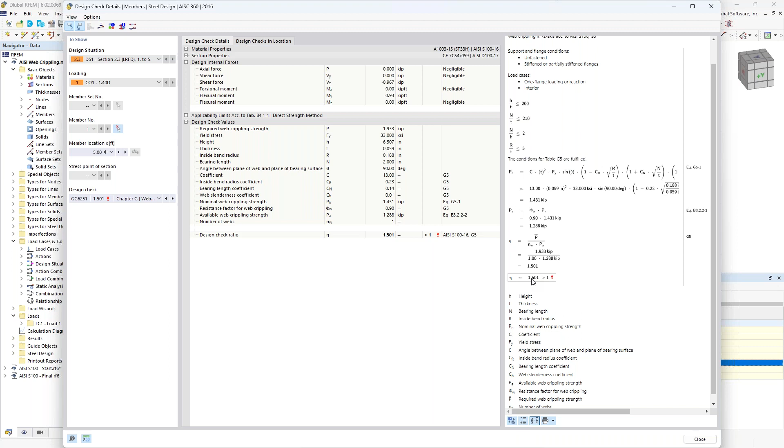We can pull open the design check details here, and we can see all of the information where we will reference those tables in G5. We list them out here in table format as well, and ultimately how we're calculating that design ratio for web crippling. So just an added benefit here of RFEM, again, that many FEA programs can't consider, but because we have those specific steel design supports, we can carry out this additional check.